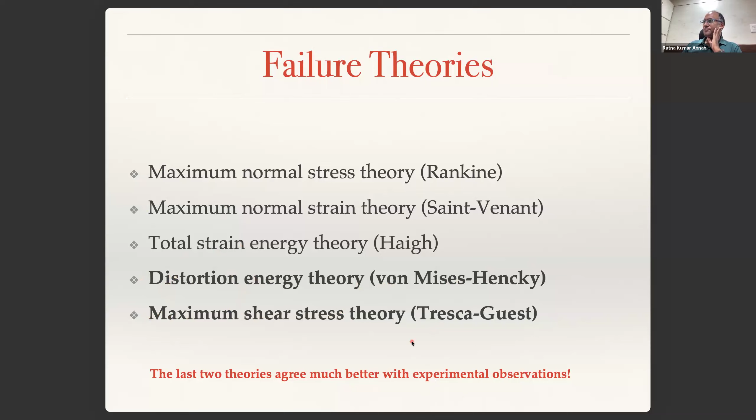So let's look at the distortion energy theory. What this theory says is the following. Before we understand what it says, we would like to look at the physical meaning of plastic deformation, or the onset of yielding.

Microscopically, yielding, that is the onset of plastic deformation, is due to relative sliding of atoms within their lattice structure. We have studied dislocations, and plastic deformation is nothing but the onset of dislocation motion. So how do dislocations move? When dislocations are subjected to macroscopic shear, locally these atom planes shear past each other, and that is what we see as plastic deformation.

So this sliding of atom planes is caused by shear stress, which is also called dislocation motion. As a result, the lattice will get distorted, meaning the lattice will change its shape.

So now, whatever energy you are putting in—suppose you are applying a load on a material, you are putting in some energy, deforming the material—the energy stored in the material will have two components. The energy contributed to the distortion, meaning shape change of the material, is an indicator of the shear stress present.

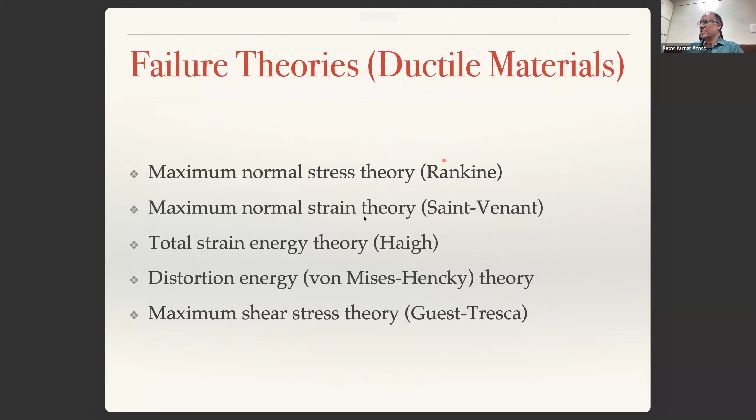People thought that when this total strain energy becomes equal to the yield strain energy, as in the total strain energy theory, that is when failure happens—this was the old school of thought. But again, experiments have proved them wrong. That means it is not the total strain energy that is responsible for plastic deformation.

So now let us look at it. The total strain energy density is one half sigma times epsilon, if you are assuming a uniaxial state of stress. But if you are talking about a three-dimensional state of stress, you have sigma1 epsilon1, sigma2 epsilon2, sigma3 epsilon3. This is something we have seen in yesterday's class.

And we have constitutive relations: strain and stresses are related to Young's modulus and Poisson's ratio like this, for principal stresses and principal strains. Now if you plug in epsilon1, epsilon2, epsilon3 with these expressions, the total strain energy density is equal to one over 2E times this expression—something we derived in yesterday's class.

The old school of thought was that when this energy in a material becomes equal to the total strain energy at the onset of yielding—that is, one half sigma_y times epsilon_y—when this becomes equal, that is when yielding happens. But people later found the data proved them wrong.

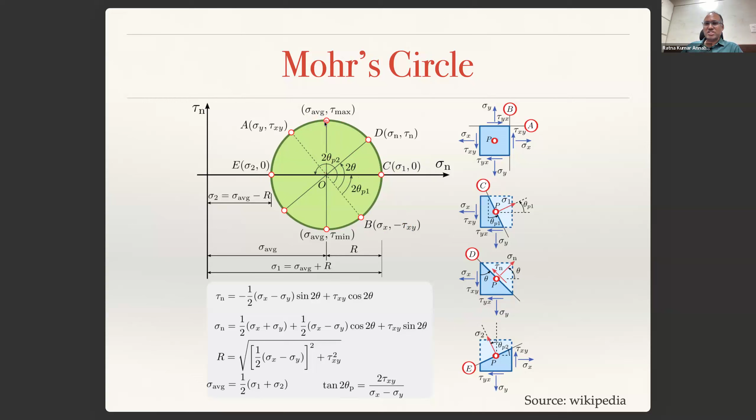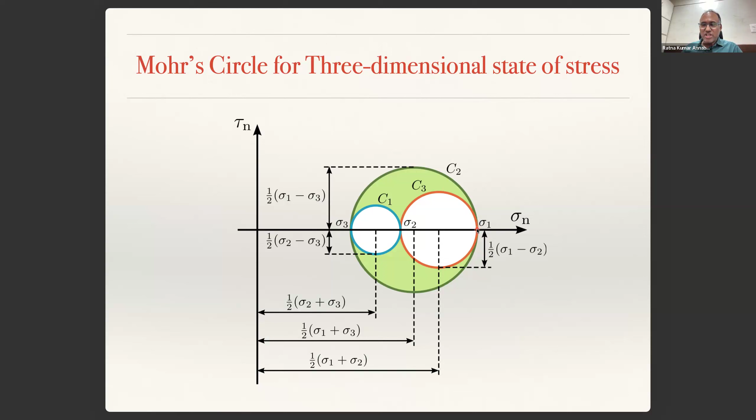But if you have a hydrostatic state of stress, sigma 1 equal to sigma 2 equal to sigma 3, then you will have a point, because the circle has zero radius - that point will be your Mohr circle, meaning there is no plane that experiences shear. If there is no plane in the material experiencing shear, then there is no shape change. That is the idea of this concept of hydrostatic stress.

So now, the total strain energy that you give to a material can be divided into two parts. A part of it is spent for volume change, which is called hydrostatic energy, and a part of it is used for shape change, which is called distortion energy. So the total strain energy in the material can be decomposed into two parts, UH plus UD.

Now you have sigma 1, sigma 2, sigma 3 as your principal stresses. Again, the stresses can be divided into two parts: one is the hydrostatic part and the other is the deviatoric part. Because the hydrostatic part should be the same in all three directions, we write sigma H, sigma H, sigma H. So sigma 1 can be written as sigma H plus sigma 1D, where sigma 1D is the deviatoric part, purely responsible for shape change, and sigma H is purely responsible for volume change, size change.

If you add all of them, sigma 1 plus sigma 2 plus sigma 3 equals 3 sigma H plus the deviatoric terms. If you have a scenario with no distortion at all, the deviatoric component should become 0. Then the hydrostatic stress sigma H will equal sigma 1 plus sigma 2 plus sigma 3, divided by 3, because under pure volume change there is no distortion, so that component becomes 0. So if sigma 1, sigma 2, sigma 3 are your principal stresses, the hydrostatic part of the stress will be sigma 1 plus sigma 2 plus sigma 3 by 3, and this hydrostatic stress will be the same in all three directions.

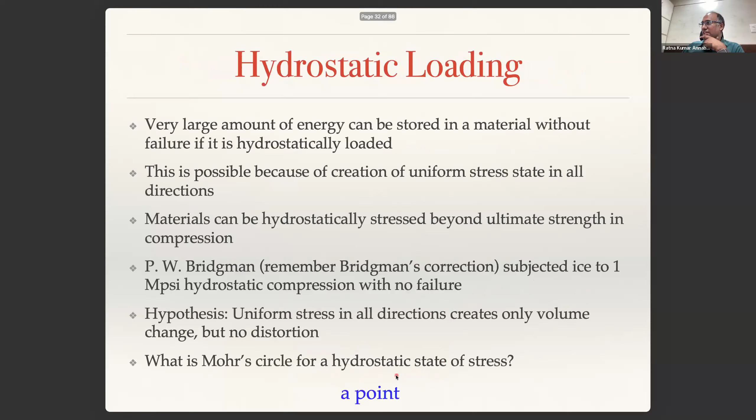If your principal stresses are sigma 1, sigma 2, sigma 3, and if all of them are same for a hydrostatic state, then UH will become sigma h square plus sigma h square plus sigma h square minus 2 nu sigma h square, sigma h square, sigma h square. So that will be 3 minus 6 nu sigma h square.

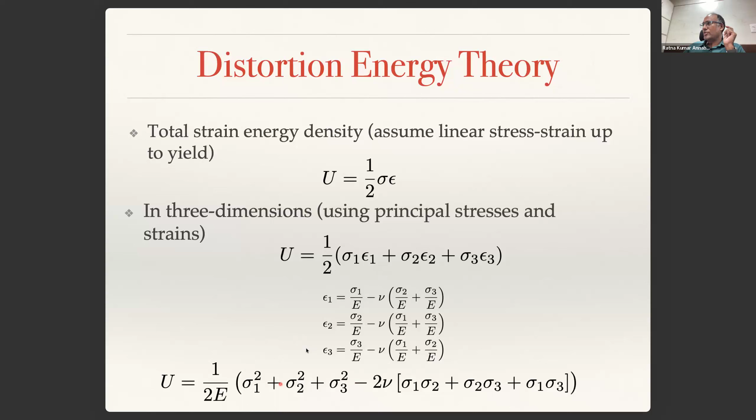If you do the algebra, this is how it looks: 1 plus nu by 3 times sigma 1 square plus sigma 2 square plus sigma 3 square minus sigma 1 sigma 2 minus sigma 2 sigma 3 minus sigma 1 sigma 3. This is the distortion energy, out of the total energy that you have supplied. Only this much energy will be used for shape change.

So in a uniaxial tension test, what are your sigma 1, sigma 2, sigma 3? At the onset of yielding, sigma 1 becomes equal to sigma y, and sigma 2 and sigma 3 are 0. So when you plug that in, the distortion energy at yielding for a uniaxial tension test will be 1 plus nu by 3 times sigma y square.

So when will a material subjected to a three-dimensional state of loading plastically deform? When this energy becomes equal to that energy, that is when it plastically deforms. It is safe as long as UD is less than UDY. So the failure criterion is UD less than UDY, and when you plug that in, this is the condition. When this value is less than sigma y, the material is safe, meaning it is in an elastic state and is not plastically deforming. The moment it is equal to sigma y, that is when it plastically deforms.

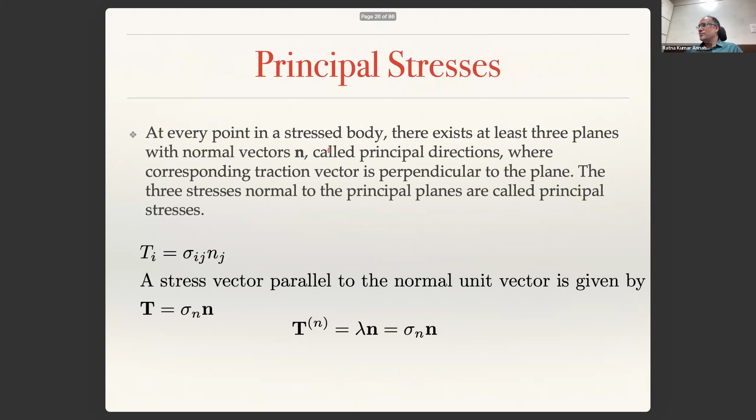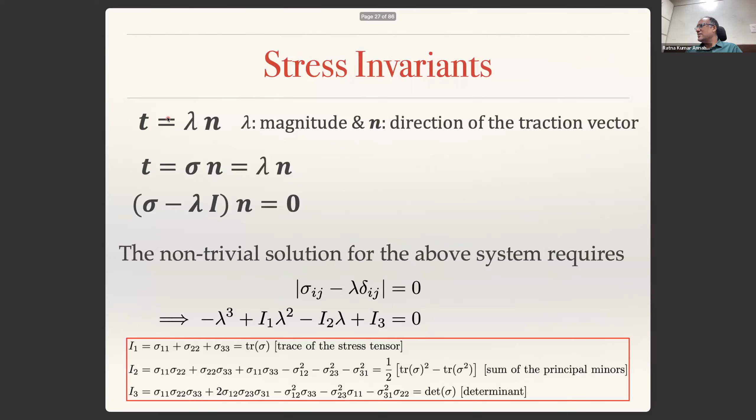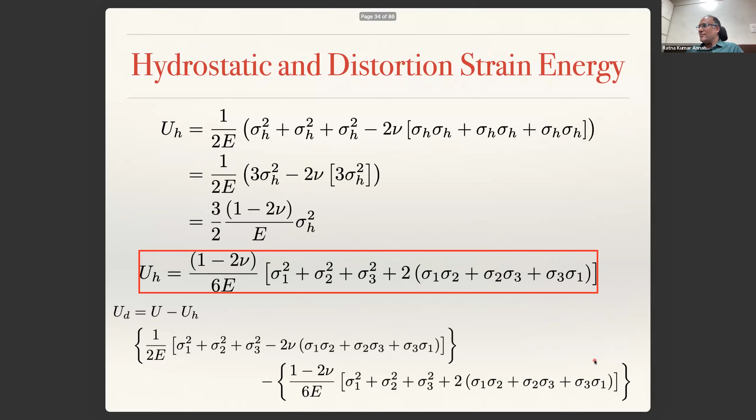That means failure happens when sigma 1 is equal to sigma y. When the applied sigma becomes equal to sigma y, that is when failure happens. Now for this next case, sigma 1 is equal to minus sigma, sigma 2 is equal to plus sigma. Please plug that into the equation using pen and paper.

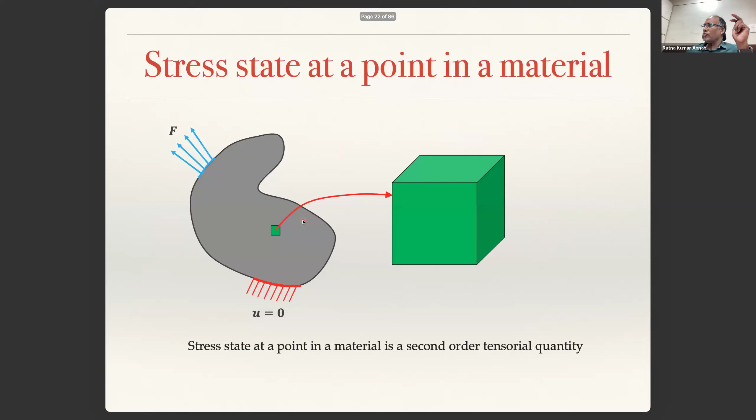Hello? Yes sir, yes sir. Can you hear me? Yes professor. Yes sir, we can. Did you understand what I'm asking you to do? Memorize the formula? No, you need to write it down. That is why I told you to write down the formula, it will be useful. Write down the formula I am giving you. I want you to work it out, that is why I am giving you the formula, please write it down. Yes sir, we are ready. Have all of you written it down? Yes sir, yes sir.

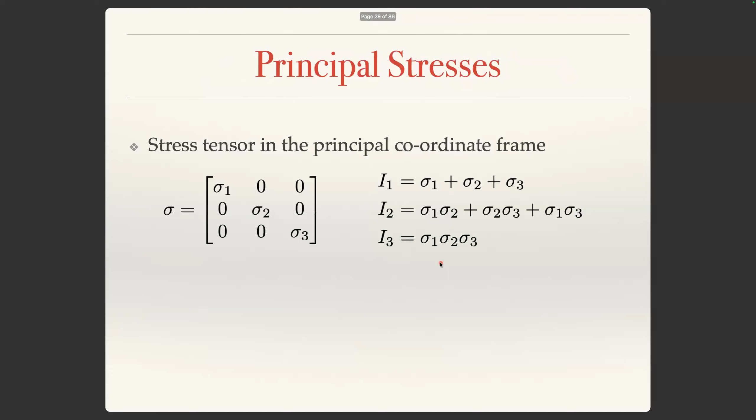Now for this state of stress, sigma 1 is equal to minus sigma, sigma 2 is equal to plus sigma, sigma 3 is 0. So square root of 3 sigma square is coming, root 3 sigma. Root 3 sigma is equal to sigma y. Sigma is equal to sigma y by root 3, that is 0.577. It should have been root 3, not 2.

Understood? That means when sigma equals sigma y by root 3, that is when failure happens. So for example, if you are applying only uniaxial tension, the amount of stress you will apply is up to sigma y. But if you have biaxial loading in the opposite direction, you will see that it is only sigma y by root 3. You don't need to apply sigma y. Is that clear? Yes sir.

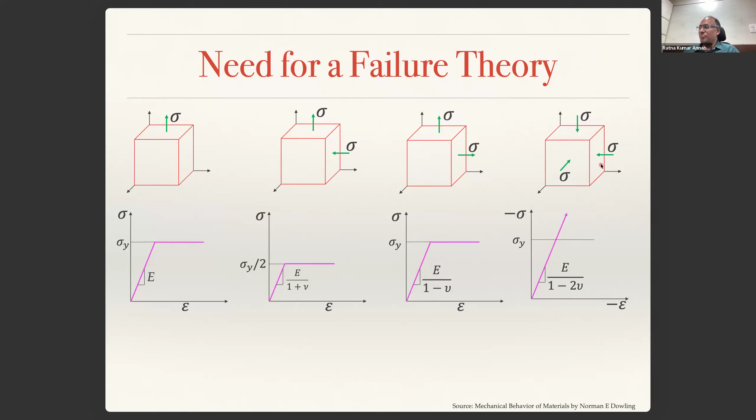Because it is a pure hydrostatic state of loading, all three directions are the same. There will only be volume change, there won't be shape change. That is why it will never plastically deform. That is what distortion energy theory says.

Now, whatever equivalent stress, that is square root of sigma 1 square plus sigma 2 square plus sigma 3 square minus sigma 1 sigma 2 minus sigma 2 sigma 3 minus sigma 3 sigma 1, we can see as equivalent stress. Can you calculate the equivalent stress for this state of stress and this state of stress? Please work out that quantity for this state of stress and the second state of stress, because in yesterday's class we stopped here.

For the first one, I am getting 5, sir. Second one, same, sir. Second one is also 5, sir.

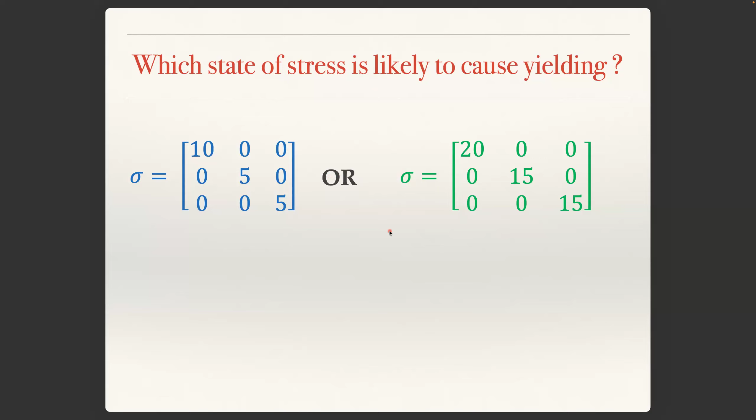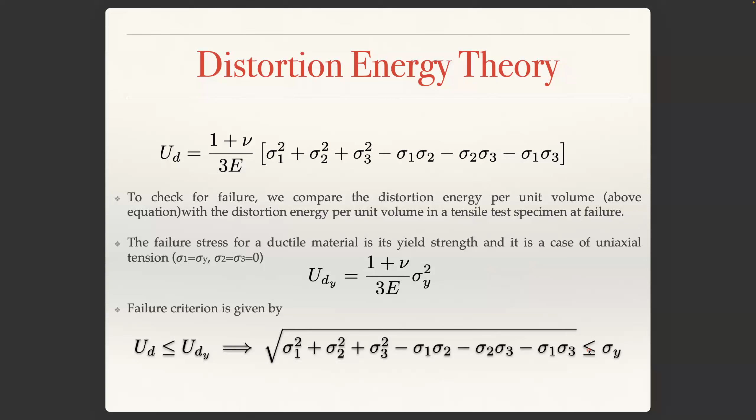So the concept of equivalent stress is very useful. Now what we have done in this distortion energy theory is that we have tried to derive a one-dimensional equivalent of a 3D state of stress and then compare that one-dimensional equivalent stress to the yield strength of the material to decide whether the material is failing or not.

So the statement of distortion energy theory is sigma y equals square root of this. So when this becomes equal, that is when failure happens. In 2D, if you are dealing with only two-dimensional problems, the maximum principal stress is sigma 1, minimum principal stress is sigma 3, it can be negative also.

So sigma 3, and hence sigma 2 is equal to 0. That means one of the principal stresses is not there because it's a plane stress. Then this equation becomes sigma y equals square root of sigma 1 squared plus sigma 3 squared minus sigma 1 sigma 3. So sigma y is a material property, it's a constant.

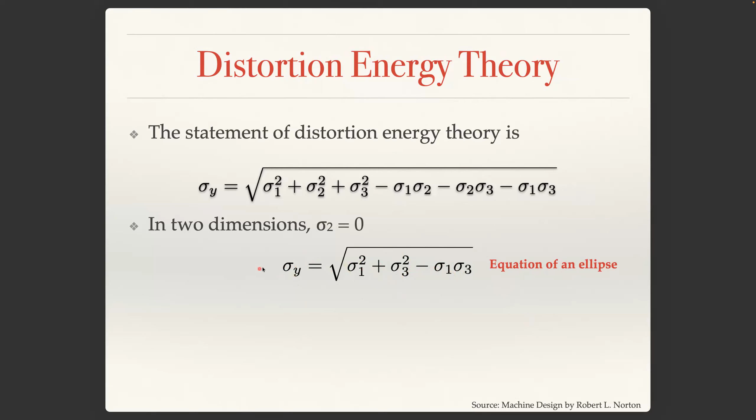So you can write this as sigma 1 by sigma y whole square plus sigma 3 by sigma y whole square minus sigma 1 sigma 3 by sigma y square equals 1, because if you square on both sides. So that is an equation of an ellipse.

So that means this is what we call the yield surface or yield locus. Any stress state within this ellipse will be safe. Any stress state on this ellipse is actually plastically deforming. Is it clear, or are there any questions here? Clear, sir. Okay.

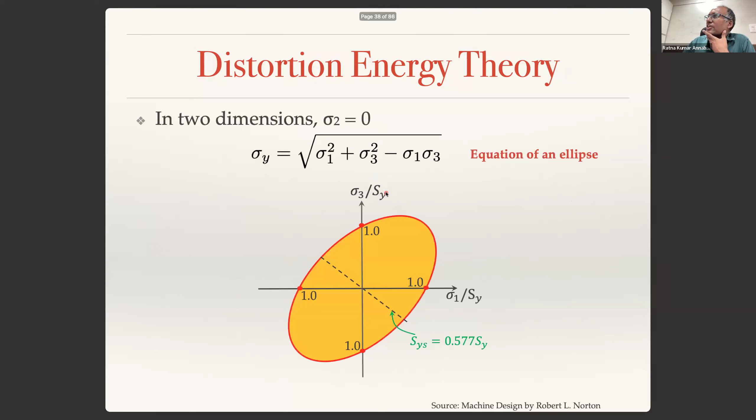So distortion energy theory in 2D is an ellipse oriented at an angle of 45 degrees to the principal axis. It is an ellipse in the principal stress space. And if you plot this in 3D, for a 3D state of stress, that will be a cylinder, a circular cylinder, which is oriented at an angle of 45 degrees to each of the sigma 1, sigma 2, sigma 3 axes.

So all the stress states inside the cylinder are safe, or on the cylinder are plastically deforming. And when you are talking about 2D, you cut any plane, then that will be an ellipse like that.

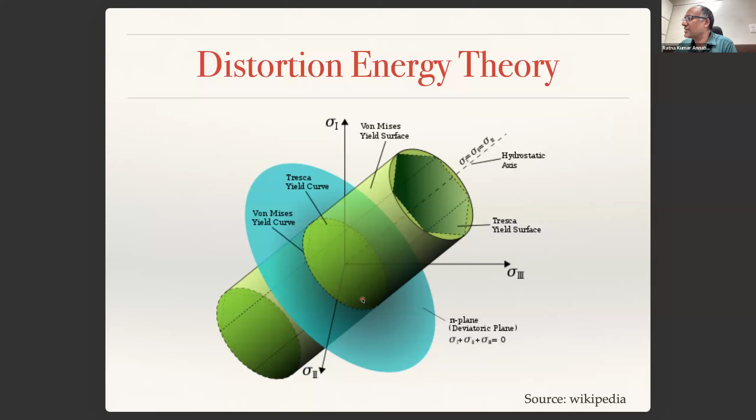That is why on an ellipse, if you cut this cylinder at a certain angle, because it's oriented at 45 degrees - suppose sigma 2 is equal to 0, you have to cut like this, then you will have an ellipse here, and that is what you are seeing here as an ellipse in the sigma 1, sigma 3 plane.

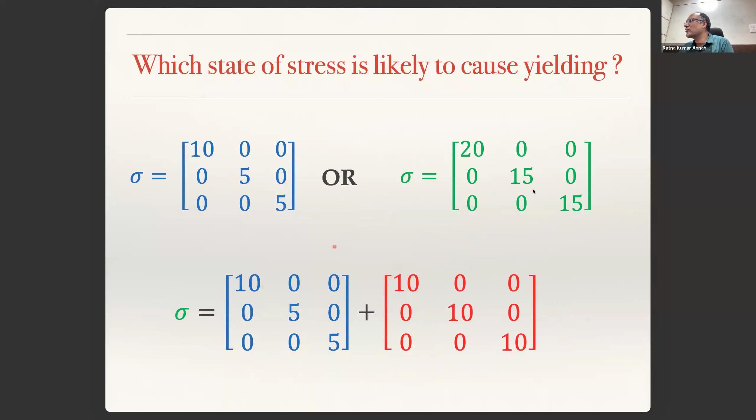And which state of stress is likely to cause yielding? This can be written as this plus this, because this is the hydrostatic part that does not cause any yielding. So this and this are equivalent as far as plastic deformation is concerned, as we have discussed already earlier. So this quantity is called von Mises equivalent stress.

When you have the stress state written in terms of principal stresses, you can directly use this formula. If the stress state is not written in principal space, but in some arbitrary plane with sigma xx, sigma yy, sigma zz, tau xy, tau yz, tau xz, then also you can directly compute the equivalent stress.

Now we define an important quantity called factor of safety. Factor of safety of your design is given by the yield strength divided by the equivalent stress. So the modified distortion energy theory is: if you have some factor of safety, then failure happens when equivalent stress is equal to sigma y by n, where n is your factor of safety.

Now, let us say this is the state of stress. Please note it down: 10, minus 6, 0, minus 6, 10, 0, 0, 0, 1. For this state of stress, I would like you to compute the hydrostatic part and deviatoric part.

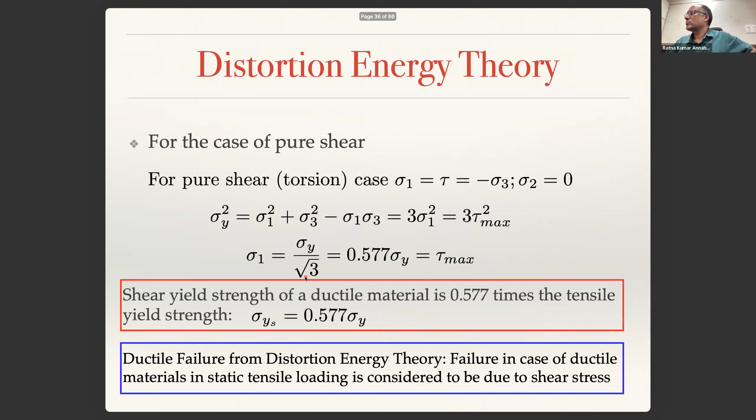So now let us do a scenario. We have made a mistake in the sign. Let us make minus 50 to be plus 50. What happens? Let us see.

Instead of writing sigma z as minus 50, we have written it as plus 50. Then what is the equivalent stress? Then 173.78. The previous person who got 173 used plus 50 instead of minus 50. Then you have estimated a higher factor of safety, which is dangerous when you do the design.

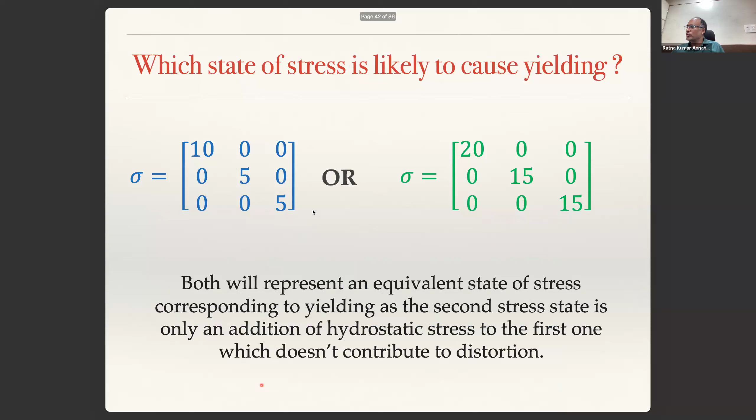So even if you don't remember this formula, you know how to compute the deviatoric stress tensor given any stress tensor. From there, you can compute the second invariant of the deviatoric stress tensor, that is the negative of the sum of the principal minors, and square root of 3J2 will give you the equivalent stress. Once you have the equivalent stress, you can compute the factor of safety. So you don't actually need to remember any formula. Is that clear?

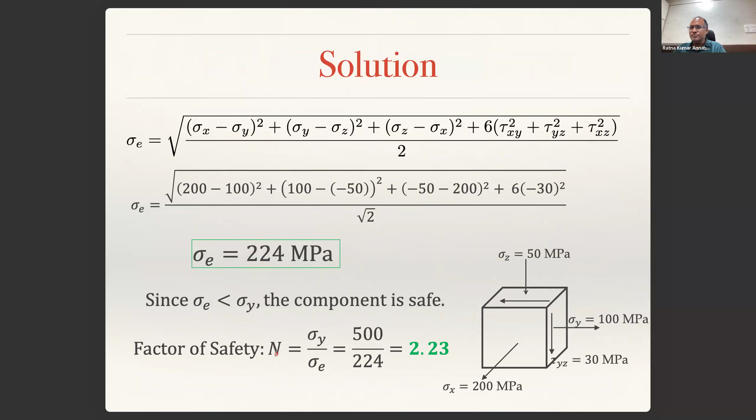Yes sir, but the sign we need to change. The specific reason for that definition? J2, the definition of J2 is not the sum of the principal minors. The definition of J2 is negative of the sum of the principal minors.

Got it sir, that means got it. J2 will always be negative, right sir? If that J2 will become negative if you don't multiply with the negative. The definition of J2 itself is negative of the sum of the principal minors. Exactly sir, so I got the point.

So if I don't multiply with the negative term, the sum of the principal minors of the deviatoric stress tensor will always be a negative quantity. Oh that's fine, because that will also indicate whether the calculation is going in the right direction or not, in that way. Correct, yeah.

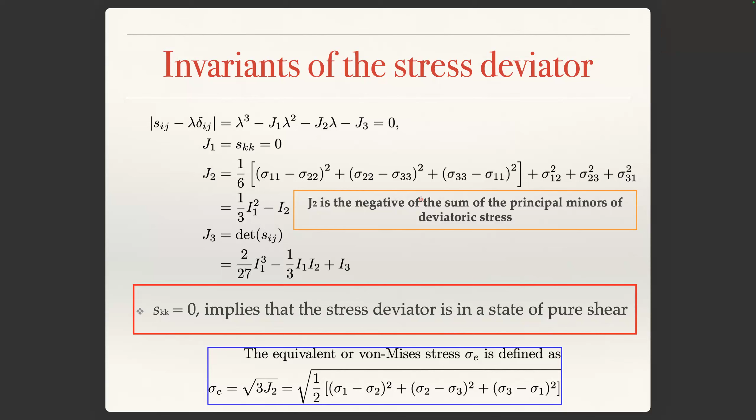Okay, now let us look at the next failure theory, what we call maximum shear stress theory, which is also called Tresca-Guest theory. What this theory says is that the failure occurs when the maximum shear stress in a part exceeds the shear stress in a tensile test specimen.

Okay, suppose if you are doing uniaxial tension test. Let me use my iPad to derive and explain it clearly, using my iPad writing.

So what it says, the maximum shear stress theory, is that when the maximum shear stress induced in the part or material exceeds the shear yield strength of the material.

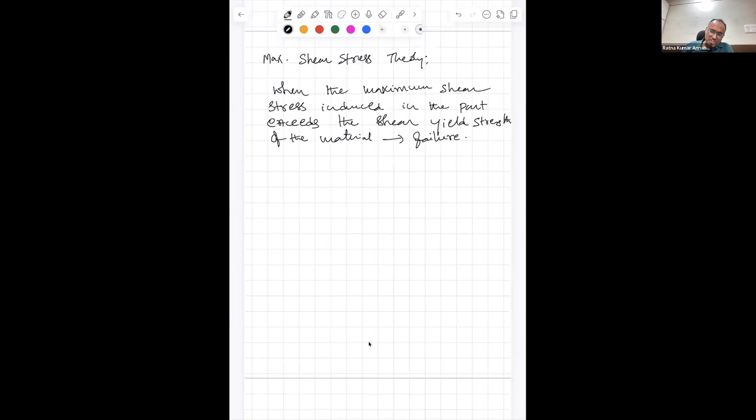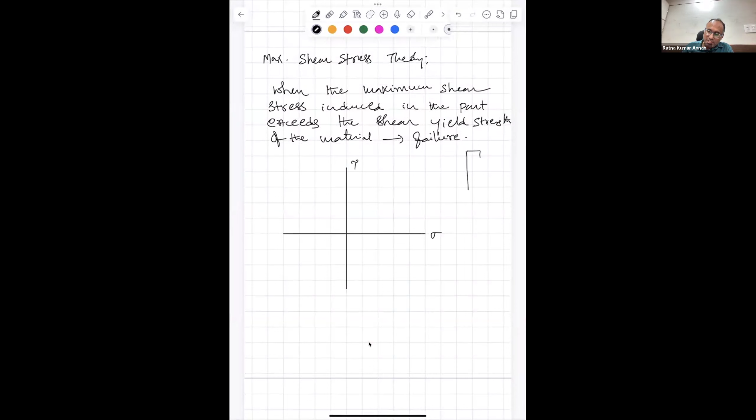Yeah, now this is a uniaxial tension test. Let us say I am doing a uniaxial tension test. The Mohr circle for uniaxial tension test will be, this is sigma and that is tau. For a uniaxial tension test, if this is my specimen, this is let us say sigma.

So at the onset of yielding, this will become yield strength, right? That is when this applied stress becomes equal to sigma y, that is when failure takes place, that is when the plastic deformation happens, isn't it?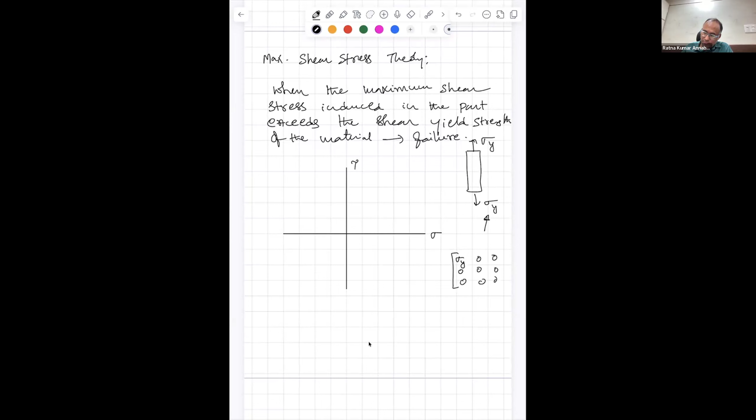So corresponding to this stress state, the stress state will be sigma y, 0, 0, 0, 0, 0, 0, 0. Right, so sigma 1 is equal to sigma y at yielding, sigma 2 is equal to 0, sigma 3 is equal to 0. Let us say this is my sigma y, sigma 2 is equal to 0, sigma 3 is equal to 0. This is sigma 2 comma sigma 3.

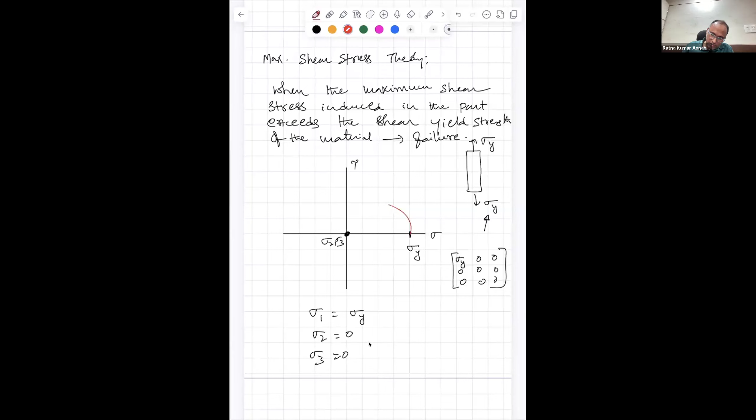Now how do you draw the Mohr circle? That is my Mohr circle, right? This is the Mohr circle for uniaxial tension test at the onset of yielding because the principal stress becomes equal to sigma y.

Is this clear? Yes sir. Now, although you are applying uniaxial tension test, this is your maximum shear stress, but that maximum shear stress is yield at the onset of yielding.

That is your shear yield strength, tau y, right? Or I would call it ys, yield strength in shear. That will be equal to what? So tau ys is half of sigma y, sigma y by 2, isn't it?

Because from here to here it's sigma y, this radius, this is the center of the circle, this value is sigma y by 2 and hence this value will also be sigma y by 2. So the shear yield strength is sigma y by 2. All of you agree with this?

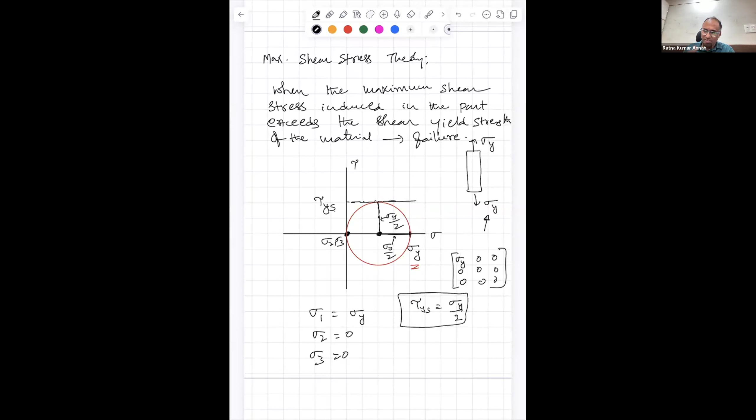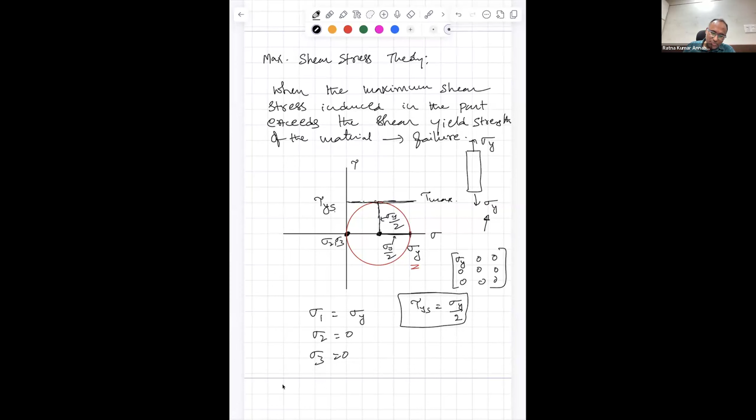Yes sir. So this is my tau max, that is the maximum shear stress. So if I am applying a uniaxial tension test and it is at shear yield strength, then the maximum shear stress induced is corresponding to the shear yield point, and that will be shear yield strength, that's the shear yield strength will be half of the normal yield strength.

Okay, now what is the maximum shear stress? This theory says when the maximum shear stress induced in the material becomes equal to the shear yield strength of the material, that is when failure happens. That is the maximum shear stress theory.

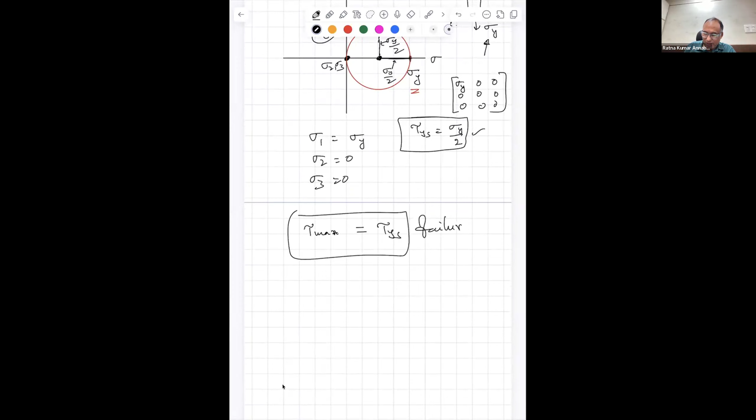Now if your stress state is sigma 1, sigma 2, sigma 3, three principal stresses in that direction, that means sigma 1 is greater than sigma 2 is greater than sigma 3. Now let me draw the Mohr circles for this.

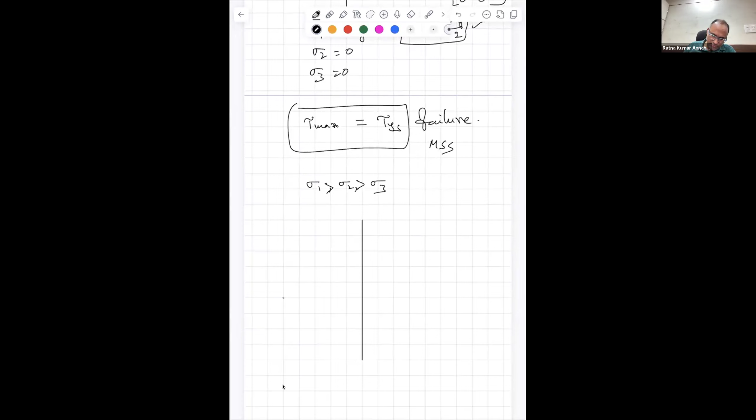For a three-dimensional state of stress, okay, let us say sigma 1 is the largest, and let us say this is sigma 2 and that is sigma 3. Now the Mohr circles that we need to draw are, one between sigma 1 and sigma 3.

This is the sigma 1, sigma 3 Mohr circle. The next Mohr circle that I would draw is between sigma 1 and sigma 2. And the next one would be between sigma 2 and sigma 3.

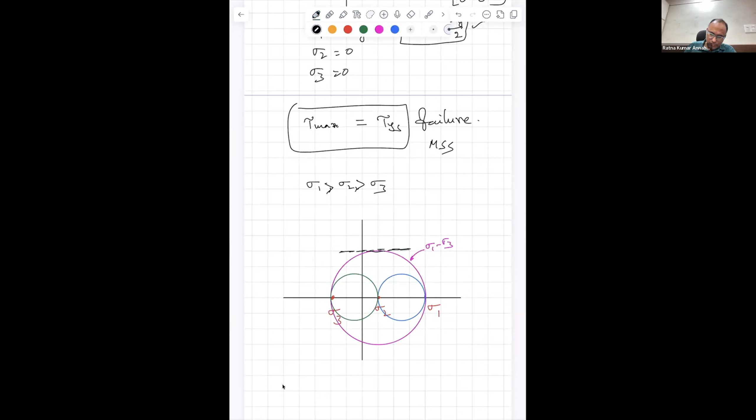Now, among these three Mohr circles, what is the maximum shear stress? This is the maximum shear stress, can you see that? Because this is another shear stress, this is another shear stress, but the maximum is this one, that is tau max. In that case, tau max equals sigma 1 minus sigma 3 by 2. Do you agree? Yes, sir.

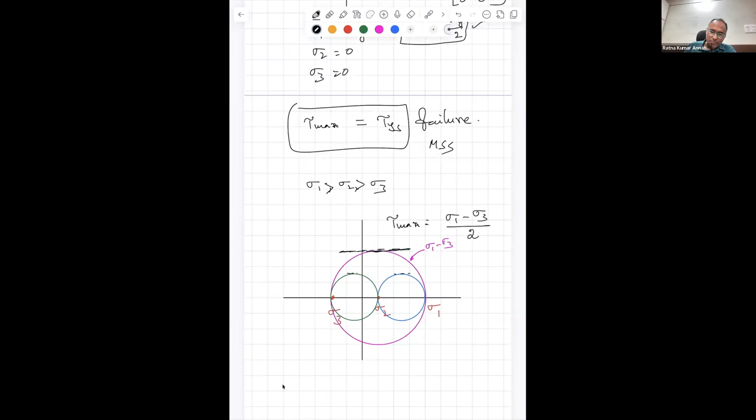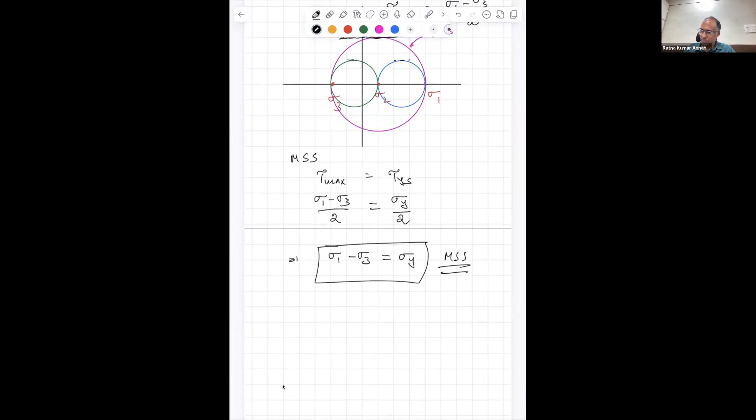In a full 3D state of stress, when sigma 1 is greater than sigma 2 greater than sigma 3, the maximum shear stress is sigma 1 minus sigma 3 by 2. Agreed? So what is the maximum shear stress theory saying? When my maximum shear stress becomes equal to the shear yield strength of the material. Maximum shear stress is sigma 1 minus sigma 3 by 2, which becomes equal to shear yield strength, sigma y by 2. That implies, according to maximum shear stress theory, failure happens when sigma 1 minus sigma 3 equals sigma y. That is the statement of maximum shear stress theory. Is that clear? Yes, sir.

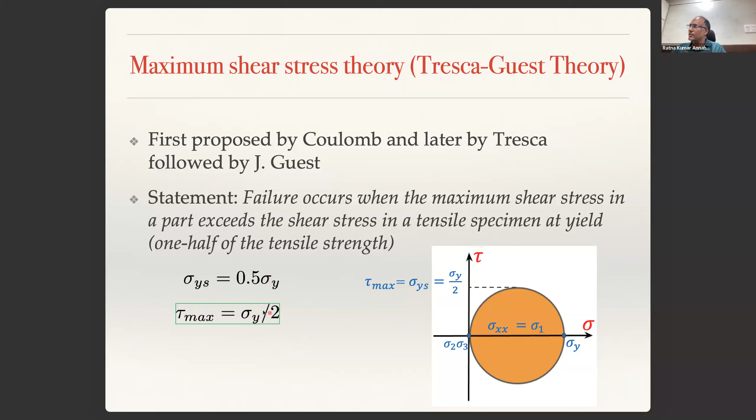So coming back to the slides, that is precisely what I have described until now. Shear yield strength is sigma y by 2. So the maximum shear stress, when it equals sigma y by 2, that is when failure happens. In a 3D state of stress, with sigma 1 greater than sigma 2 greater than sigma 3, the maximum shear stress is sigma 1 minus sigma 3 by 2. Failure happens when sigma 1 minus sigma 3 equals sigma y, or failure happens when sigma 1 minus sigma 3 is greater than sigma y. As long as sigma 1 minus sigma 3 is less than sigma y, the material is safe.

Now let us look at this scenario. In the sigma 1, sigma 3 plane, let us draw the failure surface or failure locus. Case 1: sigma 1 minus sigma 3 greater than sigma y, and let's say a scenario where sigma 1 is greater than sigma 3 greater than 0. That means both sigma 1 and sigma 3 are positive, so it is in this quadrant. Both sigma 1 and sigma 3 are positive. Then failure happens, and in a plane state of stress, sigma 2 will be 0, isn't it?

So what I am saying is, you have a 3-dimensional state of stress. In 3D state of stress, we said sigma 1 greater than sigma 2 greater than sigma 3. If that is the case, then maximum shear stress will be sigma 1 minus sigma 3 by 2, that is maximum principal stress minus minimum principal stress. Do you agree? Yes, sir. So that is what we need to do. Let us keep sigma 1 minus sigma 3 equals sigma y as our relation.

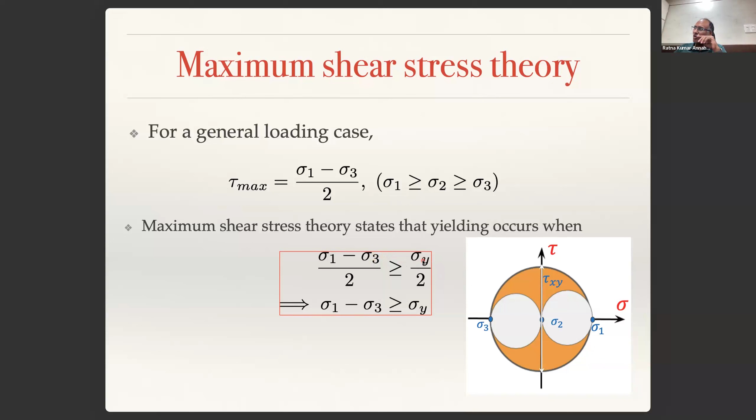Now imagine a scenario where we are looking for plane state of stress in 2 dimensions. Let us develop the maximum shear stress theory in 2D. In 2D, let us say both sigma 1 and sigma 3 are greater than 0. Because it is a plane state of stress, what should be the value of sigma 2? Sigma 2 should be 0. If sigma 2 is 0, what will the maximum shear stress be in that case?

Let me plot it for you again. Sir, again, it should be sigma 1, right sir? Because always sigma 3 should be considered as the minimum stress value. So sigma 2 should be considered as the minimum stress value, and hence sigma 1 minus 0 should equal sigma y. Therefore, sigma 1 equals sigma y. So the failure line will become sigma 1 equals sigma y. That is case 1.

Case 2: when sigma 1 is greater than 0, but sigma 3 is less than 0. Because it is a plane state of stress, sigma 2 equals 0. In this scenario, sigma 1 is the maximum principal stress and sigma 3 is the minimum principal stress, so no problem. Our original relation, sigma 1 minus sigma 3 equals sigma y, applies. Because sigma 1 is positive and sigma 3 is negative, the line will be this line.

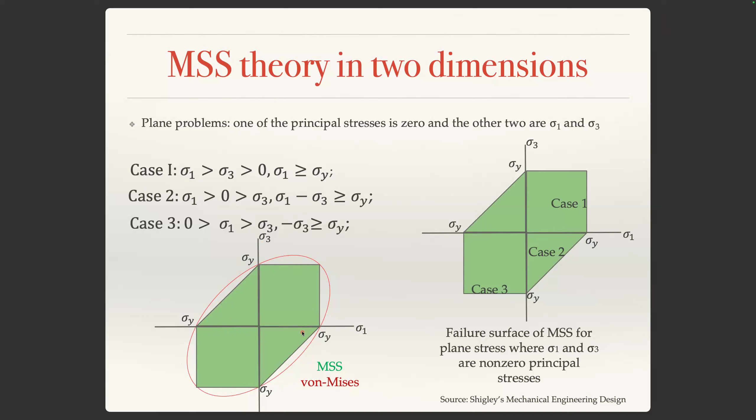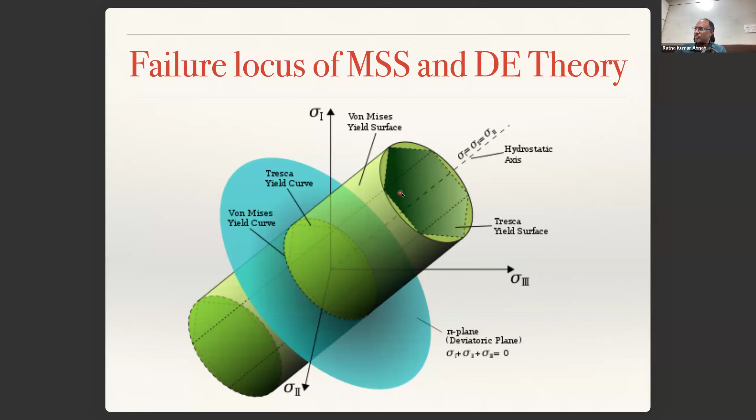Okay, so I think if that is clear, in 3D, the maximum shear stress theory will be a hexagonal cylinder, a cylinder with a hexagonal cross section. Whereas for distortion energy theory, it's a cylinder with circular cross section. For maximum shear stress theory, it is a hexagon, a cylinder with hexagonal cross section. That is the only difference.

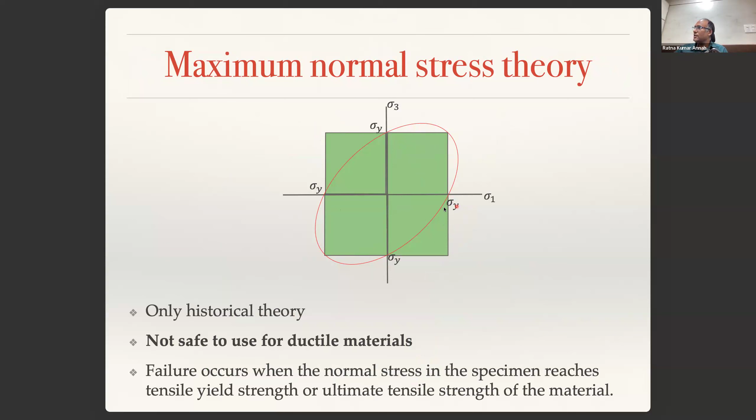And the maximum normal stress theory looks like this. This is a square, and this is the maximum normal stress theory, and this is your distortion energy theory. And if you look at this figure, you see that this is your maximum shear stress theory, this ellipse is your maximum distortion energy theory, and this is your normal stress theory.

Okay, so that is the reason why we have thrown away maximum normal stress theory and we are using distortion energy theory. I think with that I'll stop here, and then we will discuss more details about this failure in the next class and then solve some problems. Okay.